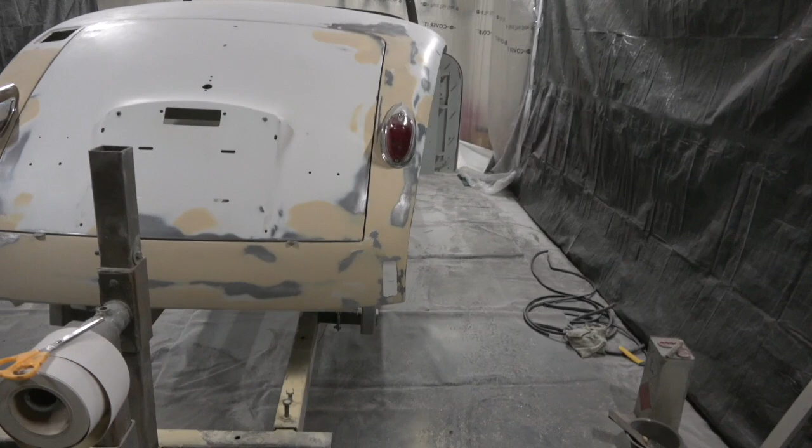I think you can see from here it's looking pretty nice. The lines are pretty good. There's a bit at the top here needs doing on that corner - it's a little bit wide there - but across the car it's perfect now, and it's all good here and all the way along.

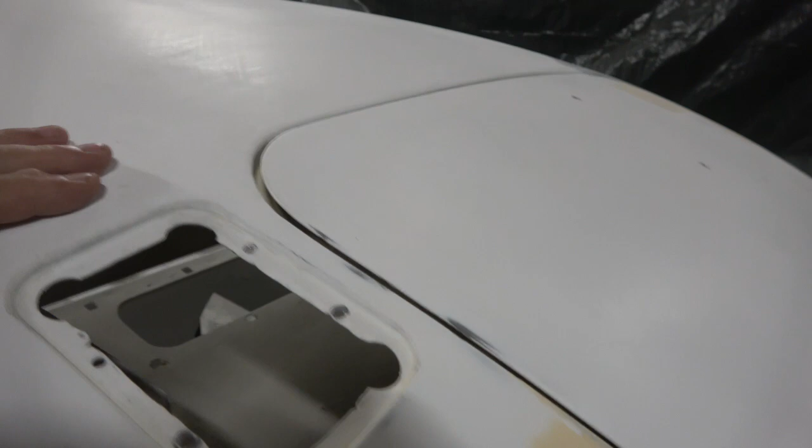As I said, the line is really nice up the side. There's an area up here that's got a bit of a flat spot in it, so that's going to have to be built up. As you can see, that is protruding slightly, but this has got to be built up anyway, so we'll take that back to bare metal and lead load it.

You can see the lead loading's already started in here. So really we want to get this tonneau finished first and get everything right before we move on.

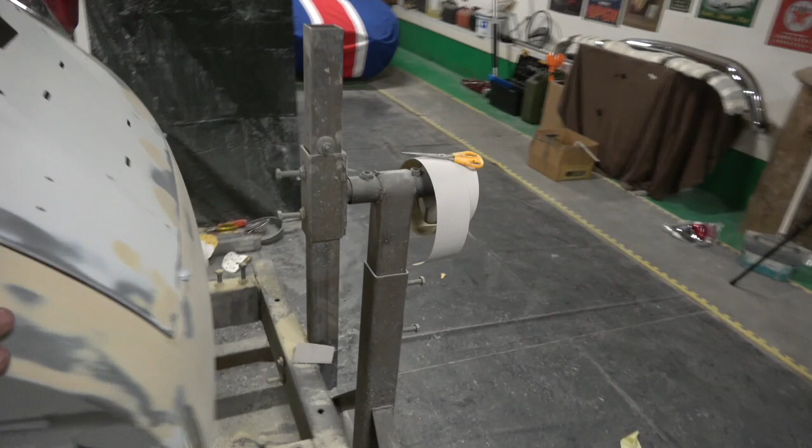Again here you can see the line is really good, but this opening is too much here, so we've got to carry on. This will have to be cut back, and we'll carry on lead loading until we get that gap the same all the way around.

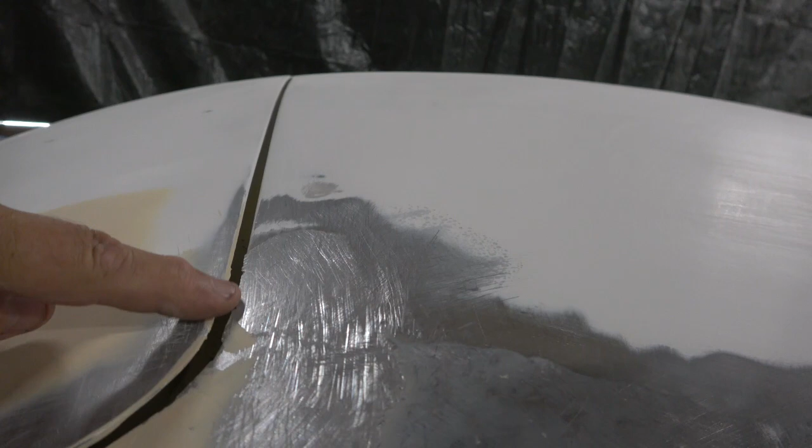But you can see it's too far away. Along the back it looks good, along there, but then as you come along you can see here where the issue is - that has to be cut out and re-leaded in there, and we'll get that spot on.

It's very time consuming, as you can probably appreciate, trying to get these shut lines right. But with any car, if the shut line looks bad, you can pick it up straight away, particularly on Jaguars. The E-Type is the most - I'm sure Ferraris and Lamborghinis are the same, I've never worked on one - but particularly the E-Type, which I'll uncover in a minute, has certain lines that just have to be absolutely right: the bonnet, the scuttle, the doors and so on, or it sticks out like a sore thumb.

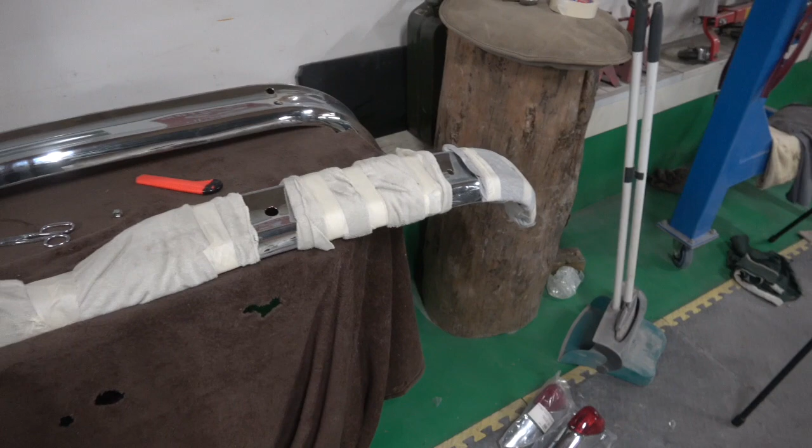As far as the bumpers are concerned, I'm just padding them up a little bit now so we can start looking at it. What we'll do first is put them onto the rolling chassis and check the measurements, then check the measurements on the back and front of the car to make sure they're going to be central, because I don't know if there are bends in them that need to be redone or reheated and bent. So I'll take you down and show you what the other parts of the bumper look like, which is the bumper irons.

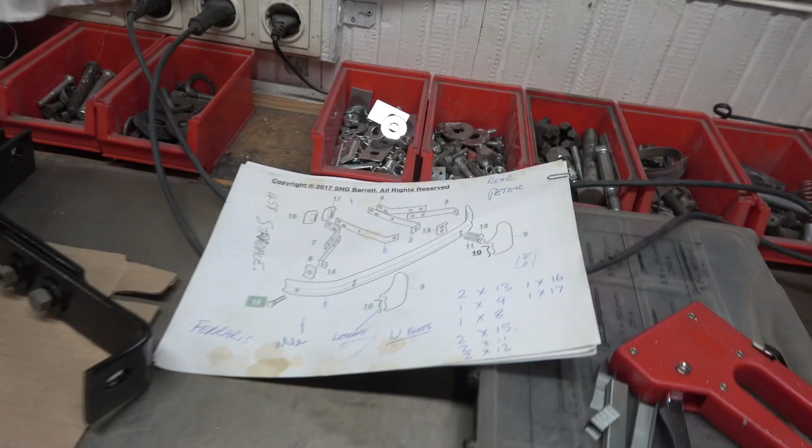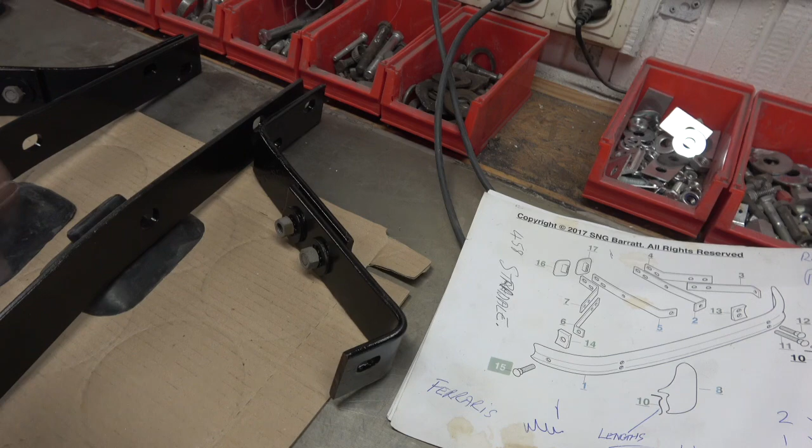I mean, you look at the thickness of that steel, it's pretty big. You have to buy the whole set, unfortunately you can't buy just this piece and this piece, you have to buy the whole lot, which is a bit annoying. But there you go, it's made out of quite a lot of parts.

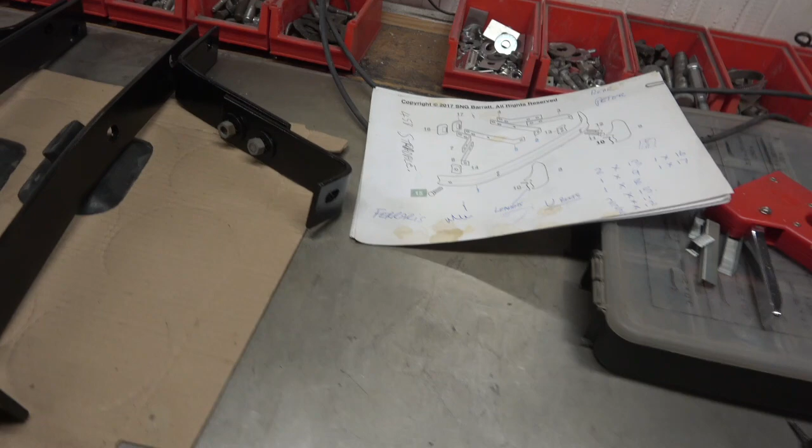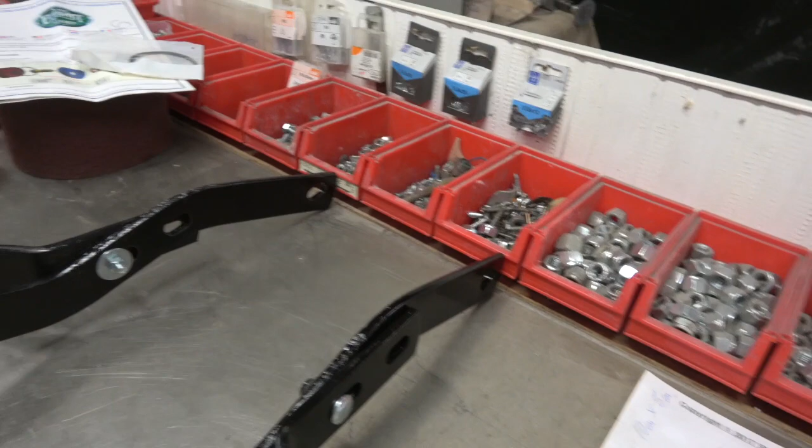So what we'll do now is check that everything is correct and it sits right, because some of the angles don't look 100%. This is the rear bumper and this is the front bumper, and you might see just how massive some of these holes are, and they use quite big washers. The reason they've done this is obviously to be able to align it correctly rather than have the metal lined up, it's how it's going to sit on the bumper when it's on the car itself.

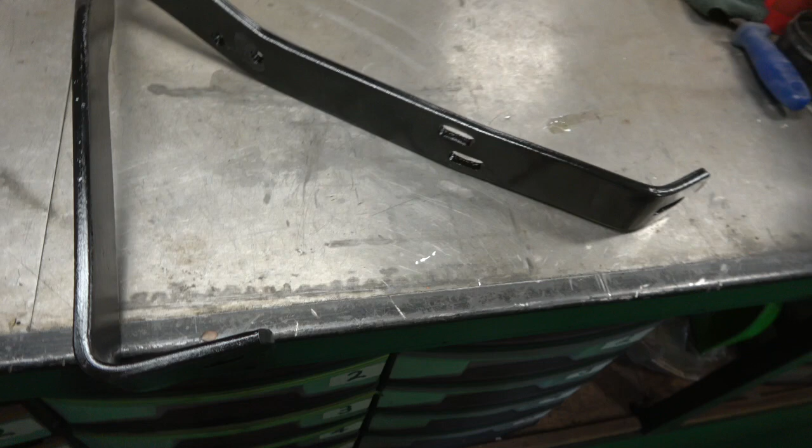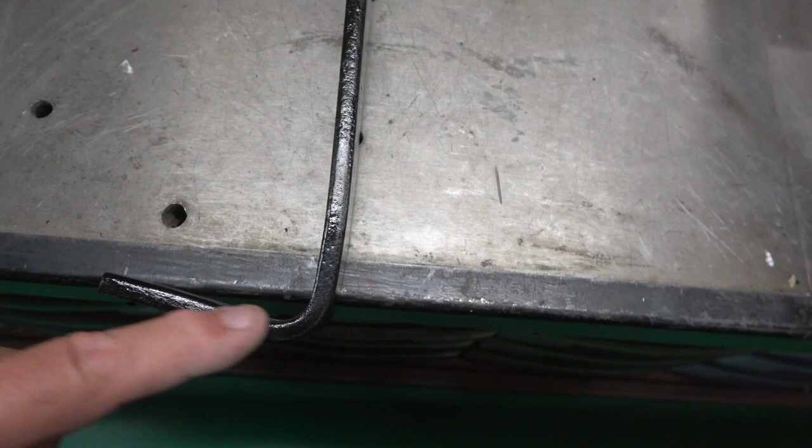These are not the correct nuts and bolts for it, these are some coach bolts I've just put in just now. But here's a typical example, if I zoom down on that there you can see how that angle is, and then here you can see how much more it's up. So this is something that's probably going to have to be heated and treated. And these have been sandblasted and then done in hammerite.

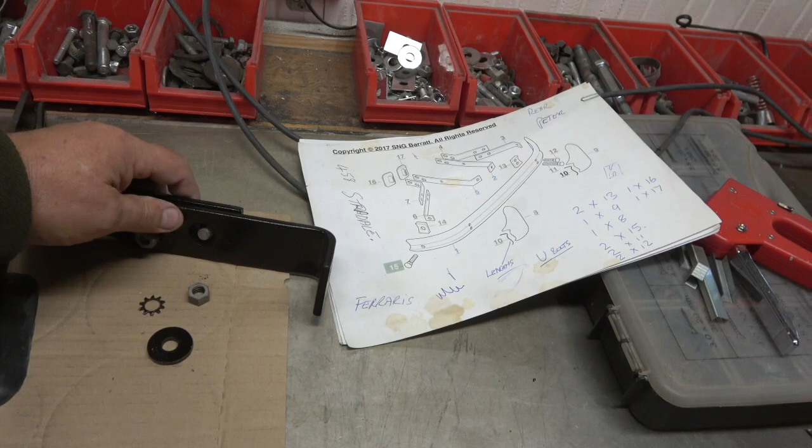But you can see, maybe if I open one of these up you can see it better. I don't know if I can get it off with one finger, maybe I can. You can see just how huge the hole is, rather than elongate some of these, what they've done is they've just made the hole absolutely massive. So you can see there just how big that is in comparison to the bolt. And these are the original bolts in it, so you can see how much movement there would have been on this to get it right.

So I shouldn't think they lined up very well, because obviously the situation with these is they have to be put onto the car afterwards, because you've got to pass this through the body, then onto the chassis, and then off of the legs up, and so on and so forth. And exactly the same with these, because they're going through the bodywork, or sticking out of the bodywork, kind of here and here. They have to be put in separately, so quite a lot of fiddling to get them right, but there you go.